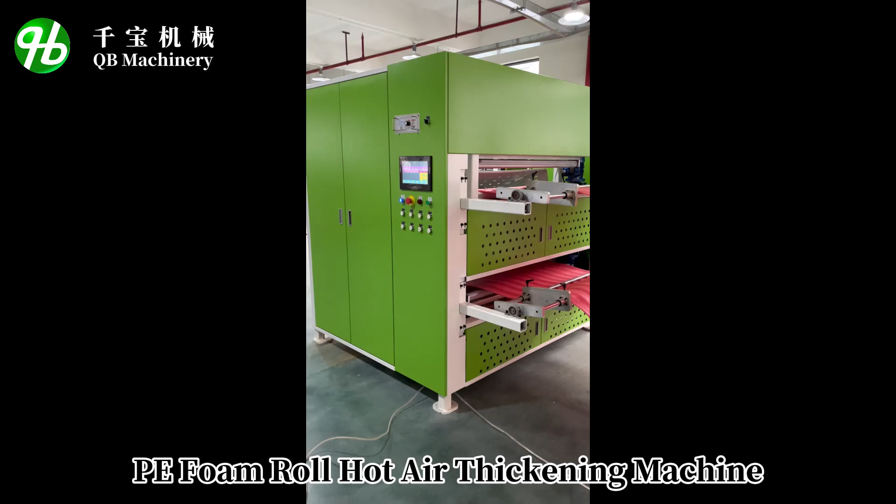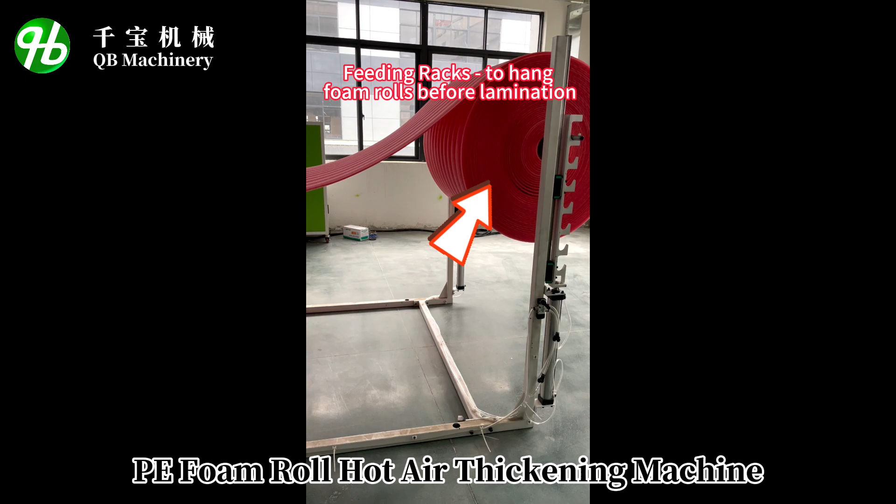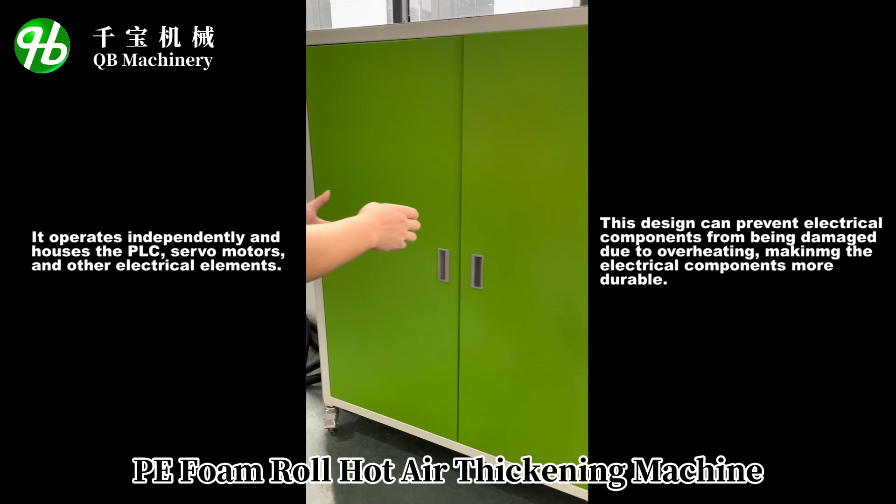It operates independently and houses the PLC, servo motors, and other electrical elements. This design can prevent electrical components from being damaged due to overheating, making the electrical components more durable.

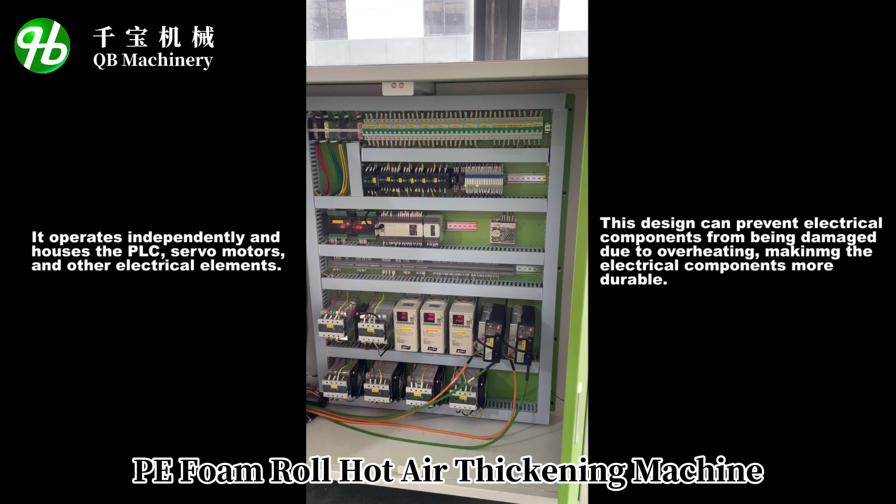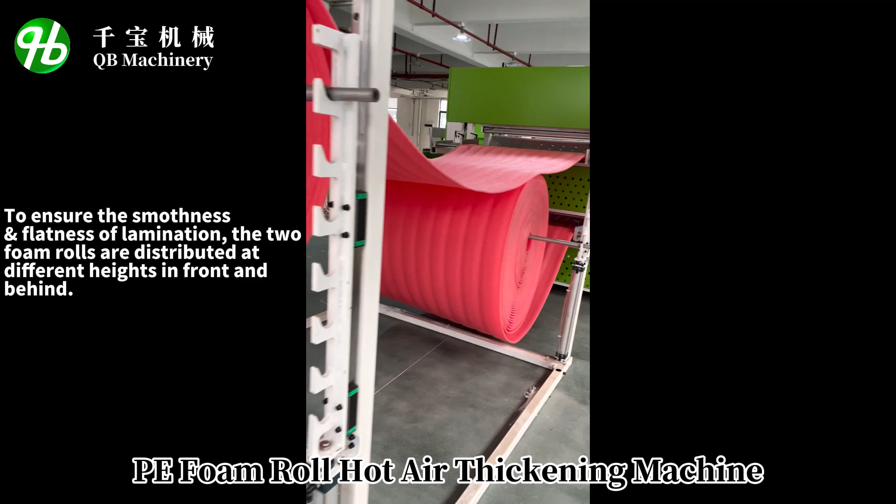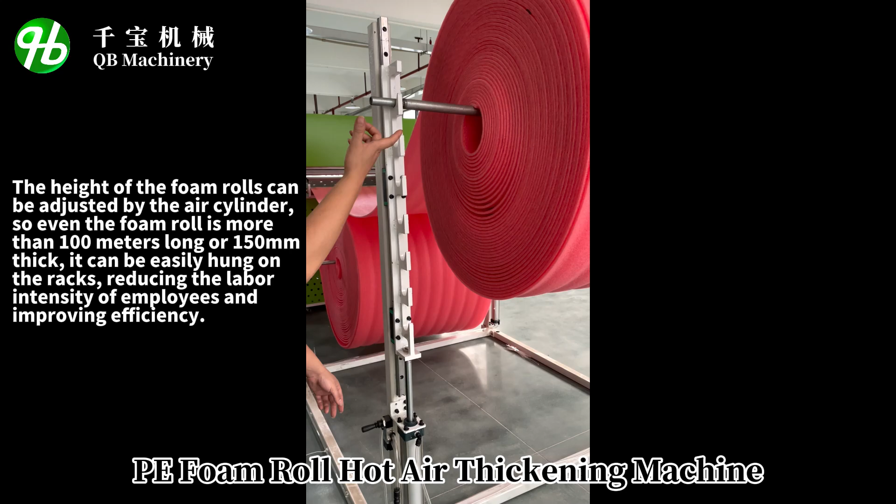To ensure the smoothness and flatness of lamination, the two foam rolls are distributed at different heights in front and behind. The height of the foam rolls can be adjusted by the air cylinder, so even the foam roll is more than 100 meters long or 150 millimeters thick.

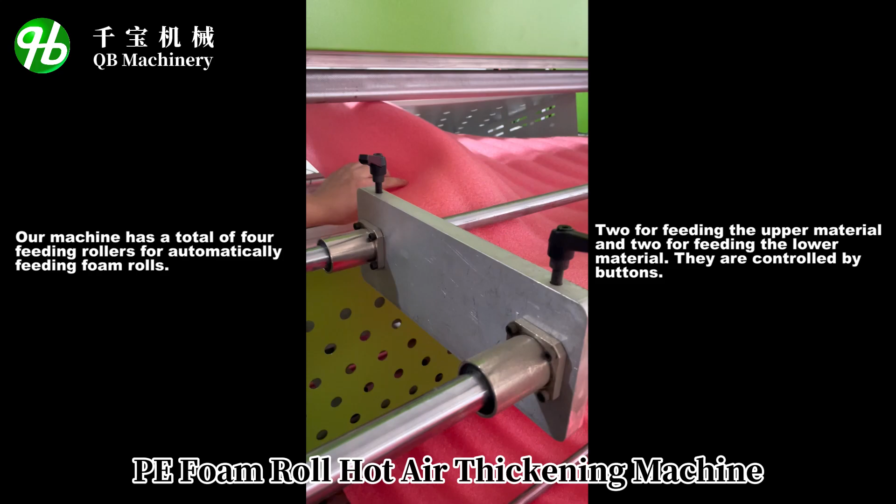Our machine has a total of 4 feeding rollers for automatically feeding foam rolls, two for feeding the upper material and two for feeding the lower material, controlled by buttons.

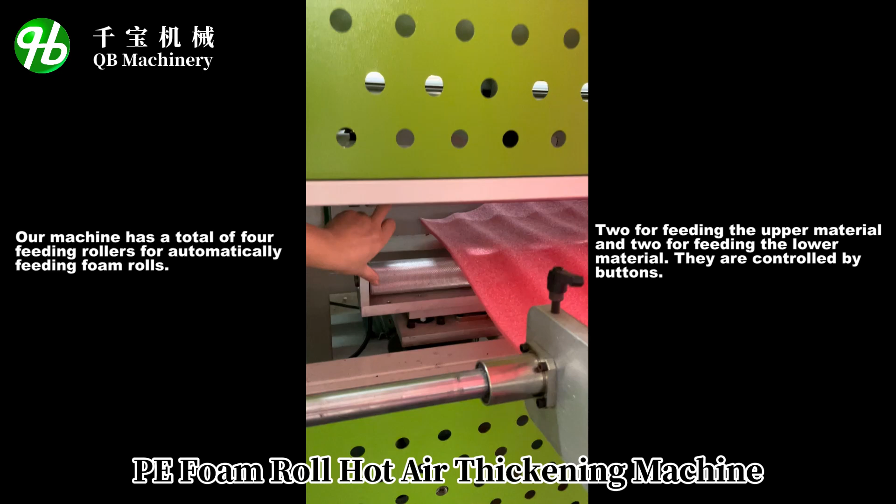Our machine has built-in needle rollers that can be synchronized to pierce the material during the laminating process, releasing excess gas and making the lamination stronger, with no air bubbles on laminated foam.

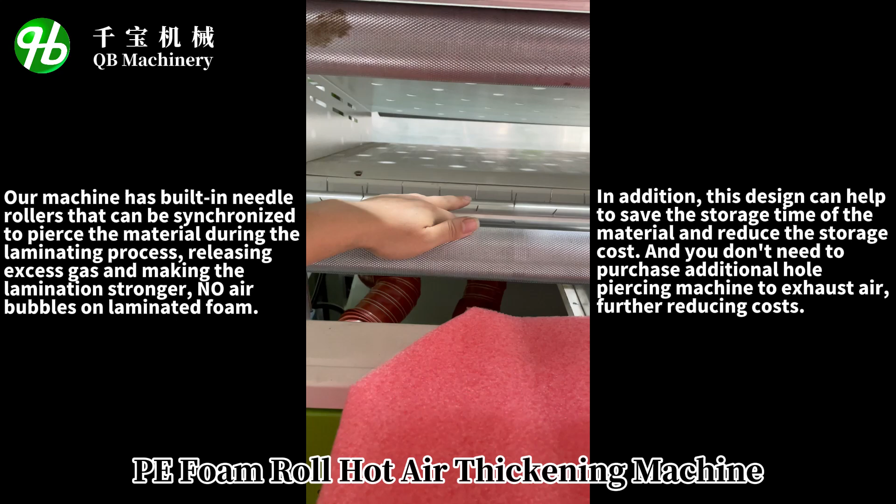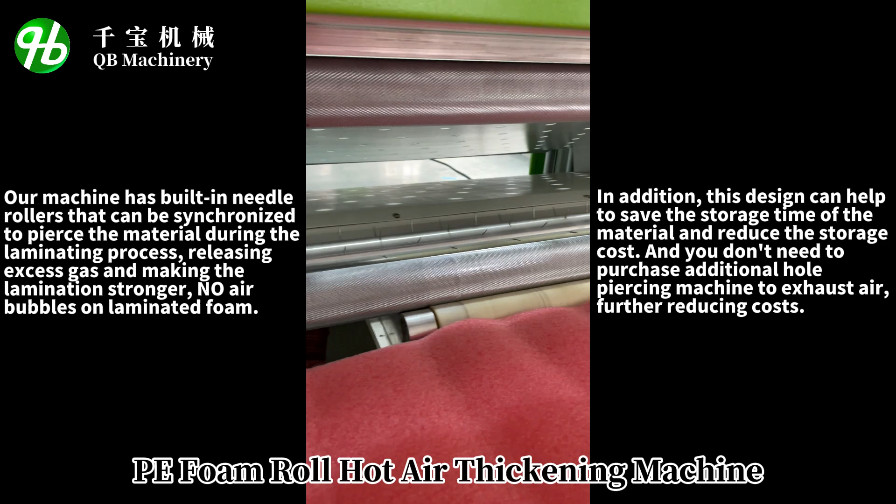In addition, this design can help save the storage time of the material and reduce the storage cost. And you don't need to purchase additional hole piercing machines to exhaust air, further reducing costs.

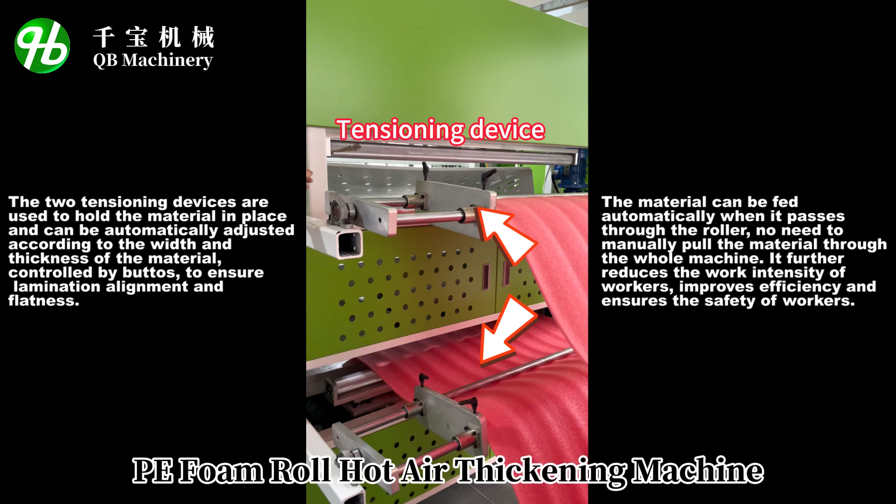The two tensioning devices are used to hold the material in place and can be automatically adjusted according to the width and thickness of the material, controlled by buttons, to ensure lamination alignment and flatness.

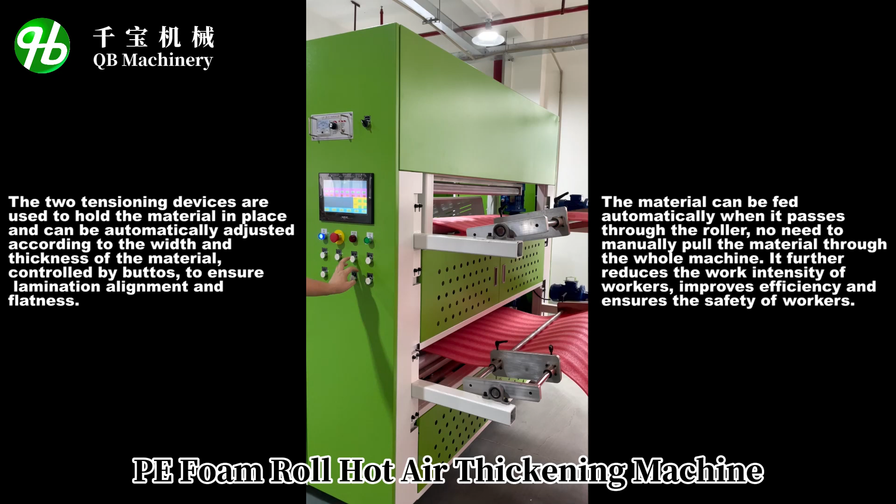The material can be fed automatically when it passes through the roller. No need to manually pull the material through the whole machine. It further reduces the work intensity of workers, improves efficiency, and ensures the safety of workers.

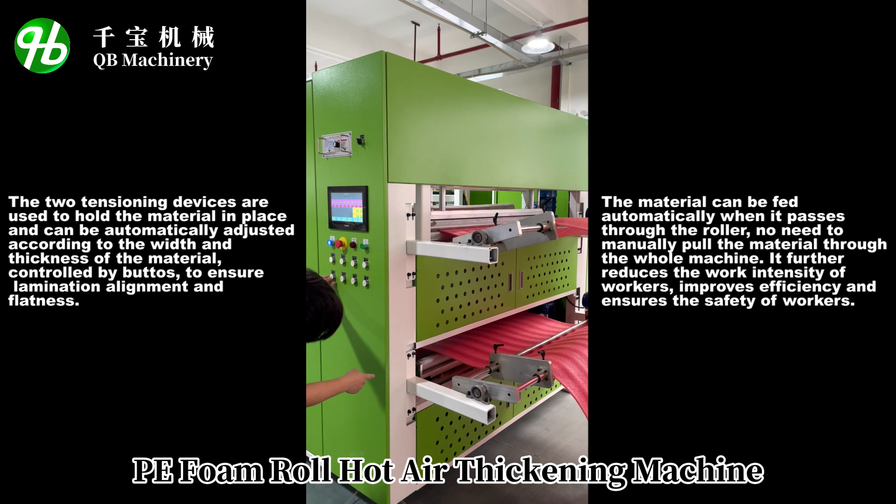The operation is very simple. Just click on the screen to heat up, set the thickness of the upper and lower materials, and start laminating with one click. No need to set other parameters, no need for an experienced master. Anyone can operate it, reducing labor costs.

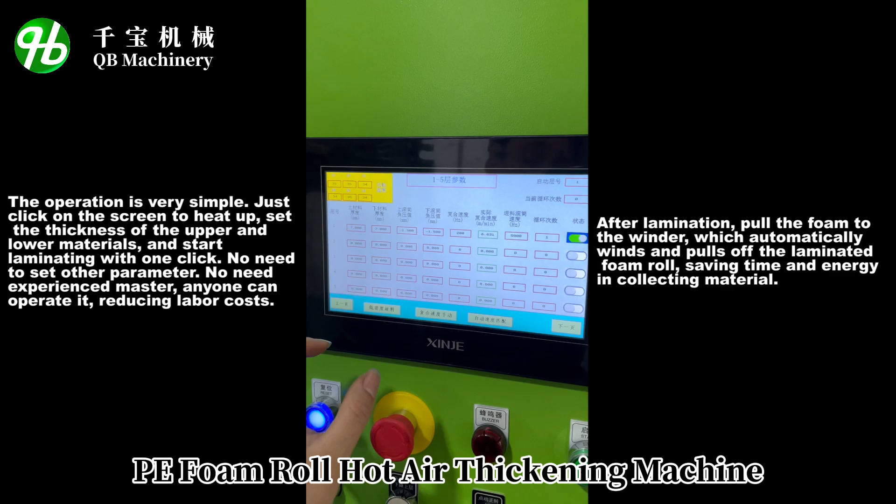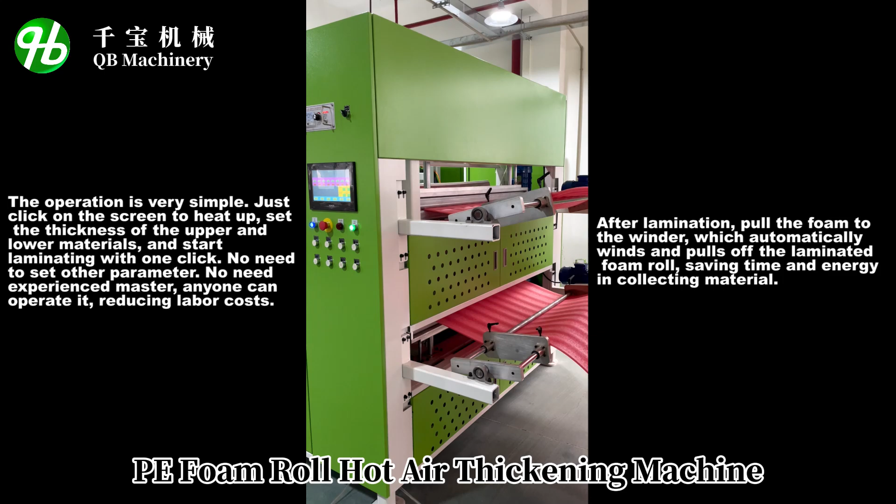After lamination, pull the foam to the winder, which automatically winds and pulls off the laminated foam roll, saving time and energy in collecting material.

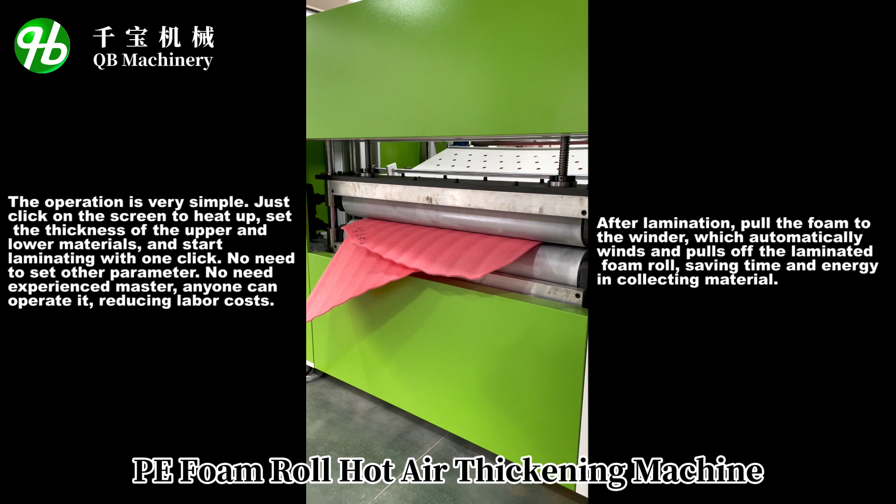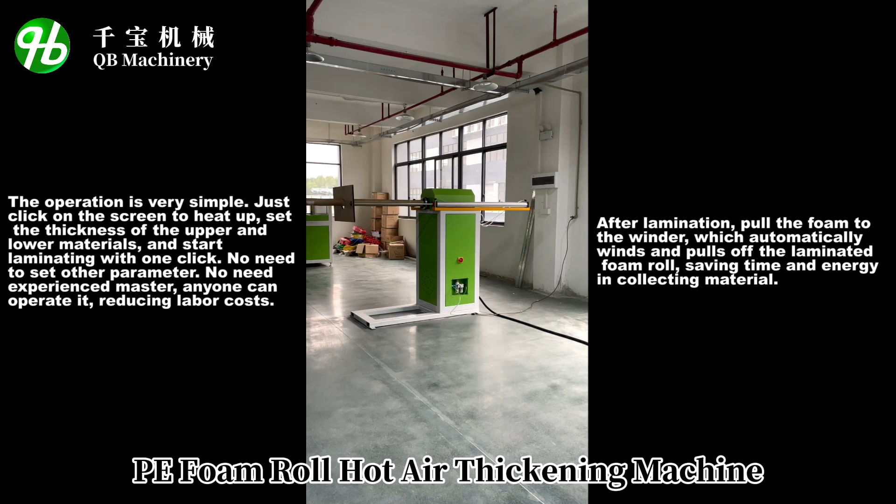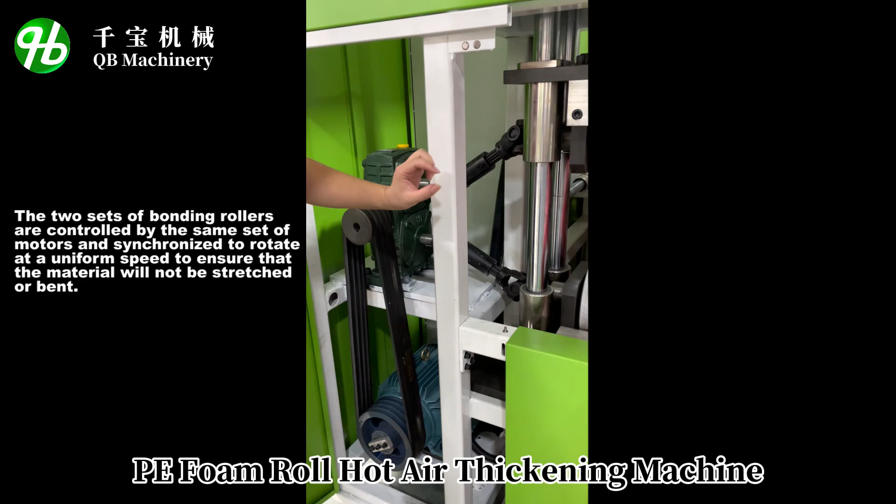The two sets of bonding rollers are controlled by the same set of motors and synchronized to rotate at a uniform speed to ensure that the material will not be stretched or bent.

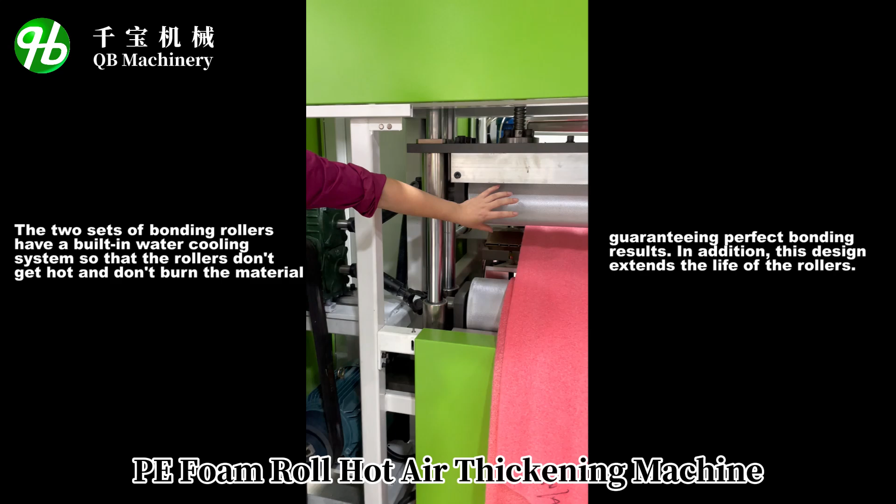The two sets of bonding rollers have a built-in water cooling system so that the rollers don't get hot and don't burn the material, guaranteeing perfect bonding results. In addition, this design extends the life of the rollers.

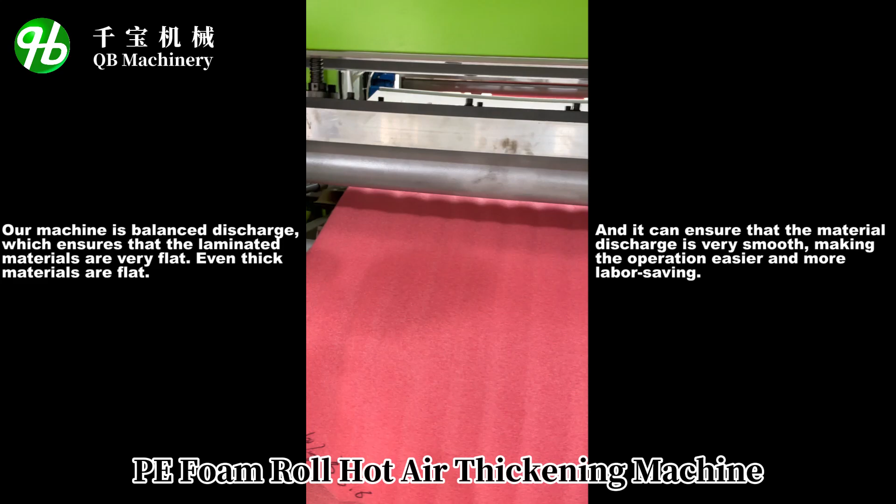Our machine has balanced discharge, which ensures that the laminated materials are very flat, even thick materials. And it can ensure that the material discharge is very smooth, making the operation easier and more labor-saving.

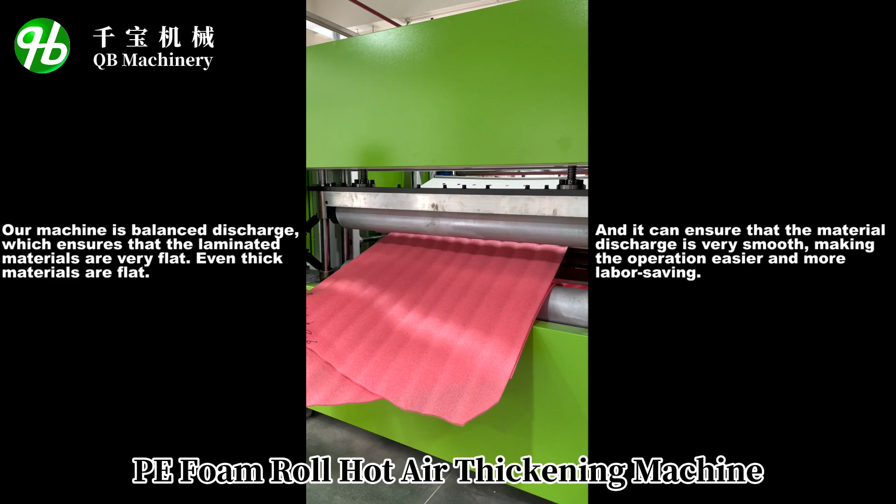Our machine is made of good quality materials, very strong and durable, with a net weight of about 2 tons. The machine is also well designed and looks great.

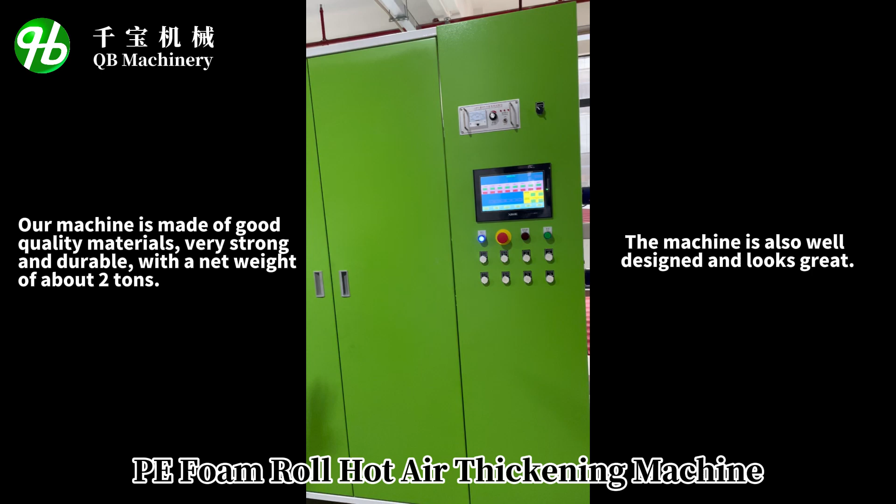This torque motor controller is used to control the winder.

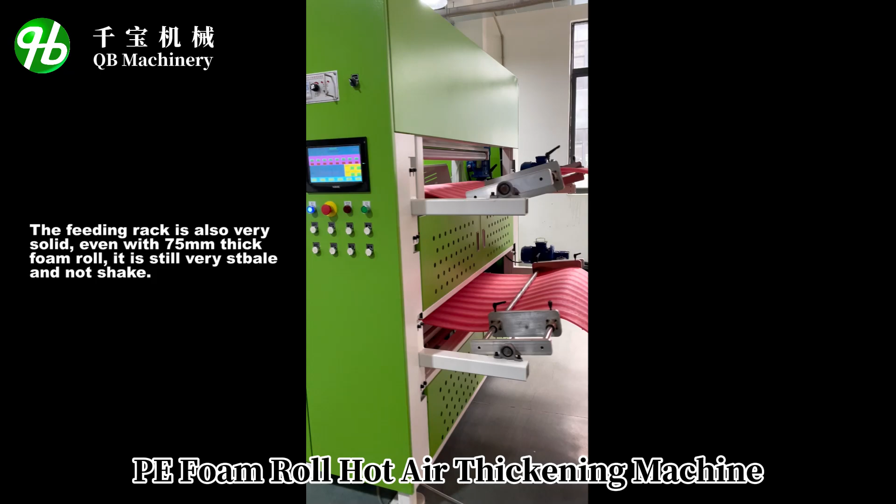The feeding rack is also very solid. Even with a 75 millimeter thick foam roll, it is still very stable and not shaken.